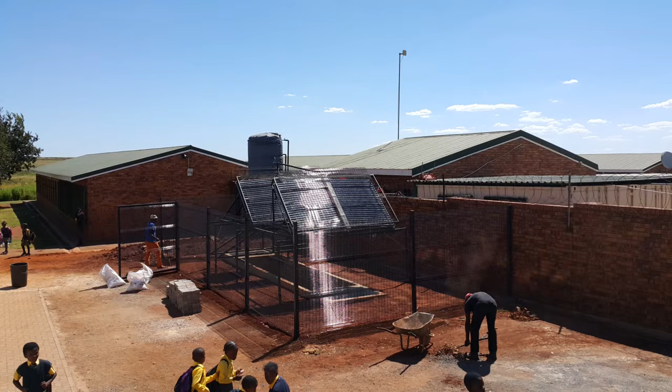The reason it was so popular at wastewater treatment works is that the anaerobic process removes pathogens, improves the quality and environmental impact of sewage sludge, which is the biggest challenge at these works. They can extract and clean the water, but they're left with sludge, which becomes a major problem. So digesters were installed specifically to reduce the pathogen content of the sludge, as well as the volume they need to get rid of.

The other probably 50% of the 400 odd installed in South Africa - nobody knows exactly how many, but that's a close enough figure - were installed as rural digesters, mainly with grant funding, in rural communities, clinics, schools, and that kind of thing. Some are still working, some are not, for various reasons, mainly maintenance and the type of digesters that were built, which we'll talk about later.

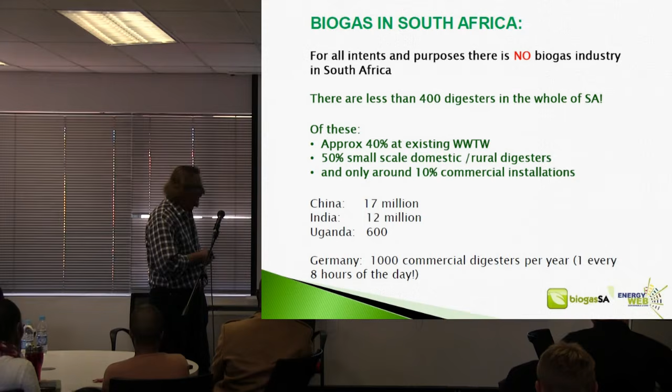But if you compare that to a country like China - we talk about having 400, China's got 17 million digesters. India's got 12 million digesters. Uganda, next door to us, not exactly a big country, has got 600 digesters. So there's a massive potential for biogas to be developed as a viable, sustainable, sensible technology in South Africa.

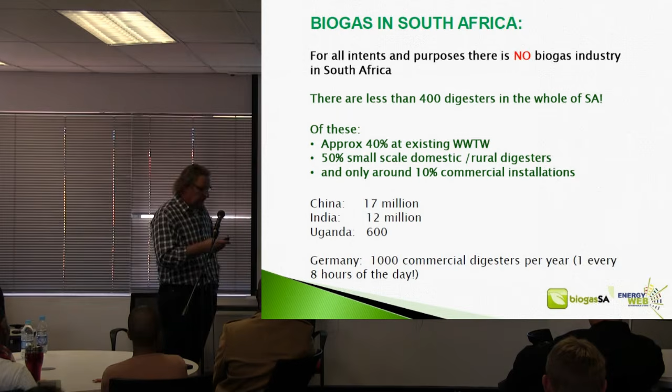The Germans are the leaders. They've got about 7,000 large-scale commercial digesters up and running in Germany at the moment. It's sort of reached a plateau and is dropping down quite considerably. So we've got a lot of interest from European biogas companies looking at the potential in South Africa. At one point they were building one commercial digester every 8 hours, about 1,000 digesters a year. There are many other European countries that are also quite advanced and make use of biogas.

This is just interesting to see - there's a massive potential in South Africa. Putting small digesters into areas where people can see it, like Cummins is doing, that's brilliant. From an association point of view, from a biogas enthusiast's point of view, that's the kind of project we need to get out there, so our kids can see practically how biogas works and say, wow, that makes a lot of sense - getting them involved in bringing food waste from home to school, chucking it into the digester, and knowing that their lunch tomorrow afternoon is made from the food waste they put in. That's where we need support, and the work you guys are doing with schools is absolutely brilliant - we applaud you for it.

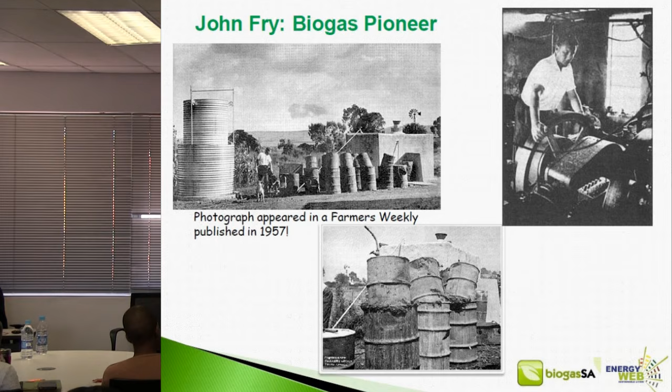Here's something interesting - I mentioned that way back we had digesters in South Africa. This chap here, you can Google him, John Fry. He's seen as one of the pioneers of the early commercial digesters. He had a pig farm and started with a very simple system - as you can see, it's just two 45-gallon drums. The top drum actually sinks into the liquid of the bottom drum, and that way it seals it so no gas escapes.

And as the gas is generated, the top drum simply starts floating. Very crude, but it worked.

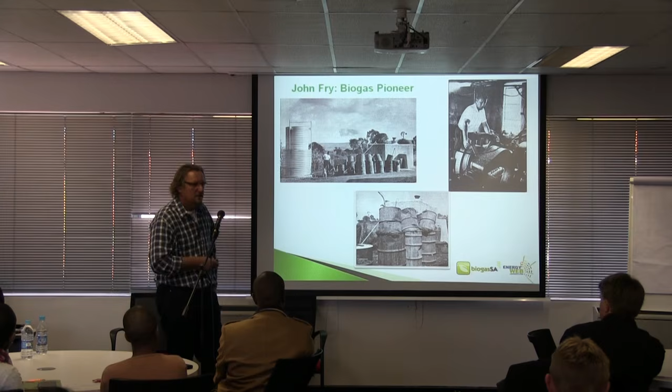He ran his Lister 6 horsepower engine for about 3 or 4 years on biogas. Interesting enough, the main reason he started experimenting with biogas is because of his neighbors, who complained about the smell of his pig farm. That's how he started with biogas.

Eventually, as I said, he made very good use of his manure to generate electricity, and it largely solved his smell problem as well. This was in the Farmers Weekly in South Africa in 1957. That's where this article appeared.

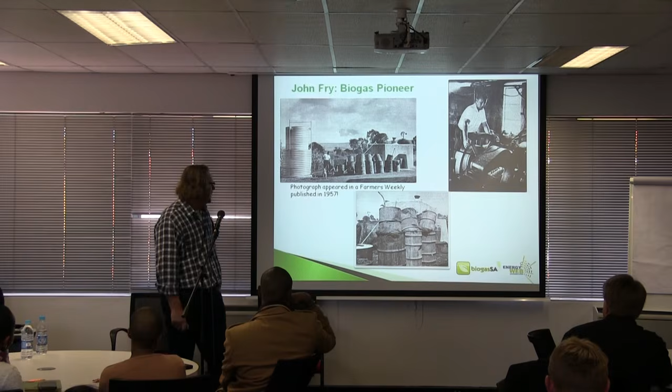So in the 1950s, as I mentioned earlier, we were the leaders in biogas, or initiated the practical application of biogas technology in the world. Eventually, he didn't get the support, and he went to the UK, tried his luck there, and eventually ended up in America, where he passed away. So the technology was lost.

I could have made the speech in 1957 if everybody listened to what old John Fry was saying.

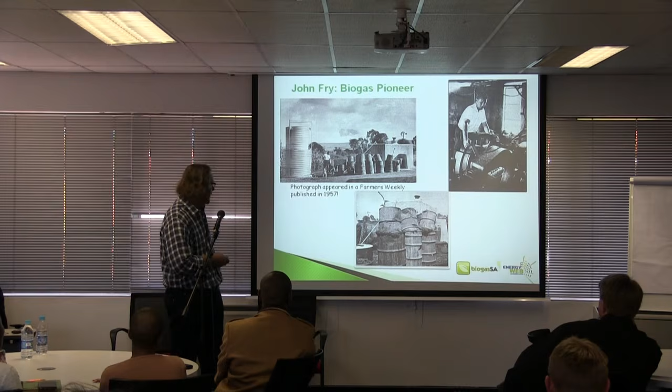Okay, now let's talk a little bit about what you can put into a digester. Typically, whatever you can eat can go into a digester. Any material that can be digested by your digestive system would be ideal to go in, with one or two exceptions. A digester doesn't like too much acidity because it likes to be maintained at a neutral pH.

So too many orange peels and stuff will affect the digester. But in essence, anything you can chuck on a compost heap, or that you could eat or could potentially digest - I mean, you're not going to eat manure, but you will be able to digest it, and the digestive system would be able to deal with it.

In wastewater treatment works, a lot of work was done in the early 1970s or late 1970s and 80s on sewage waste. We've actually got one of the most modern and recent projects - a commercial 1.2 megawatt installation done here at the Johannesburg Sewage Works, Joburg Northern Works sewage plant. They had digesters there dating back to the 1980s.

They refurbished the digesters, and about 2 years ago they put out a tender for somebody to utilize the biogas to generate electricity. It was very successfully done by a company called WEC Projects. You can go to their website, it's actually quite impressive - a very neat installation.

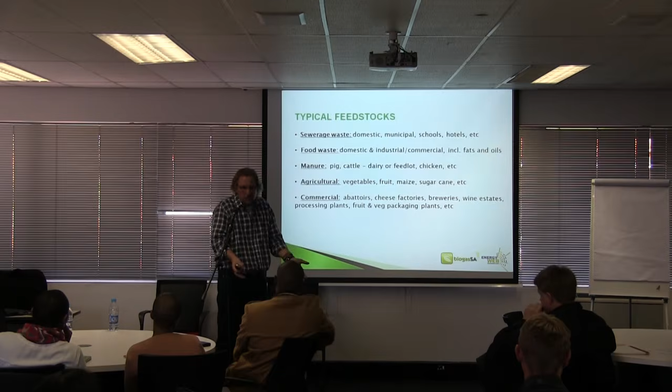And the energy you would have acquired from this, if it's not used, is it entirely stored until it is consumed, or is there a chance of losing it if it's not used within a certain period of time? Does it get completely stored?

Good question. Normally digesters work on a continuous basis. So if you chuck 100 liters of slurry into your digester on a given day, 100 liters will flow out the other side. It's only the solid content in your liquid that gets consumed by your microbes. One of the biggest things people neglect to understand or make provision for is that if you put 100 liters or a ton in on this side, it doesn't disappear—you still get a ton coming out on the other side.

You've just removed most of your solids that's been eaten by the microbes, so biogas isn't perfect. It's a brilliant system, but it doesn't just make things disappear - that would have been great as well. So whatever you put in on one day, you've got to either let it run out on another day or pump it out on the other side. So that was one of your questions - the other one will come back to me in a second.

Just on that point as well, whatever the consistency of the material going into your digester, I always say as a rule of thumb, it's got to be in the form of a runny porridge. The finer it is, and it's got to have enough liquid in it that you can pour it, that it can run - that's just a rule of thumb. It needs the water, diluted by water.

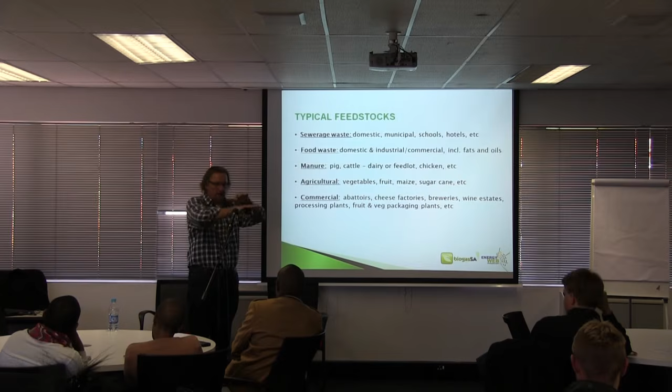So the guy said, 'Listen, have you got some waste pipe and a sail? Give me the normal waste pipe, 110 mil drainage pipes.' He made a square out of it, covered it with a sail, chucked it on that pond, and within an hour, that sail was standing with biogas. He tapped it off, and he lit it for the farmer. I mean, that's how practical it can be.

So the simplest form of a larger scale digester is what they refer to as a lagoon digester. It's literally for the pig farmers - all their manure gets washed out into dams. In its crudest form, you can literally just dig a trench right around the dam, cover it with a sail, bury the trench in the ground so the gas can't escape, and you tap off the gas. It can really be as simple as that.

And we've got the biggest plant to date that's on the cards. It's in Bronkhorstspruit - a 3 megawatt plant. It's massive, a 140 million rand project, based on primary feedstock from a cattle feedlot. They've got about 25,000 cattle standing in one spot, so that's a very good source of feedstock for your digester. But that's a massive installation based on a feedlot basis.

And manure - agricultural, obviously any kind of food waste. In Europe, you'll find that probably 90% of their digesters in Germany run on silage. So they grow grains, ensilage it, and that gets fed into the digester. That's obviously quite controversial because it's food that now gets used for energy. So that's a controversial topic in any country.

But also in South Africa, we've done a proposal for a fruit packaging plant - fantastic project. Instead of chucking and trucking all their skins and peels and fruit away, it goes into a digester. So there's massive potential there. I'm busy with a project with the Sugarcane Association down in Durban to use their cane tops that get burnt on the fields at the moment, to use that as a source for biogas.

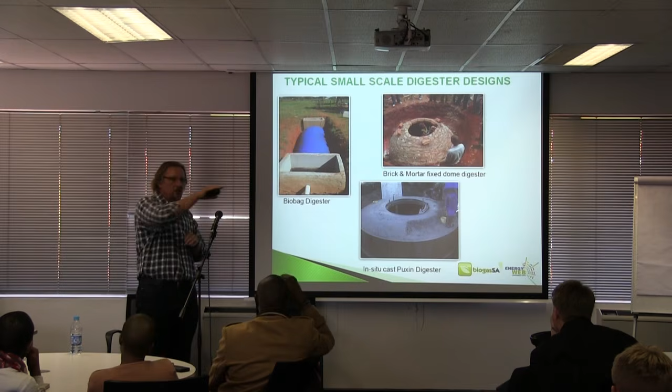If you've got a hose pipe, fill it up with water, and you put a cup of water in on the side, it's simply going to push out a cup of water on that side. Most digesters work on the same principle. You put your material into the inlet. It will progress through your digester, eventually come into the outlet, and your outlet pipe level will determine the level in your digester itself. So if you put in 100 liters there, it will simply raise the water level until 100 liters has run out of your outlet again. If you've got an area with a bit of a gradient, it can gravity feed out again, so you don't have to pump anything.

This is a digester I installed in Northwest Province. The ground is flat there, there's no gradient. So they put a bucket of slurry, manure slurry and food waste in on that side, and they take the same bucket and remove the same quantity out on this side and put it onto their vegetables. If they don't do that, the whole digester volume will be filled with liquid, and there will be no space for the biogas to accumulate.

How much do these cost? It very much depends. The biobag solution is probably your cheapest, it comes in a kit form, or you can install it. You can probably install that for about 15,000 rand. Your fixed dome digester is probably about double that cost, if not more. There's also an in situ cast concrete digester that's going to cost even more. So it depends on your application, where it is, your access to material, what kind of feedstock you've got.

So that's one of the biggest challenges around biogas: deciding what system you want to use, what type of job creation you want to do, how much skills transfer you want to do. Ideally, if we're talking about rural areas, you want to get the community involved as much as you possibly can, and let them install and train them how to build and operate the digesters, which is a little bit different from your big commercial digester.

So this is just typically 3 different types. This is called a biobag, or a soft balloon type digester. And that's what the majority of digesters in the world are built using - a brick dome structure.

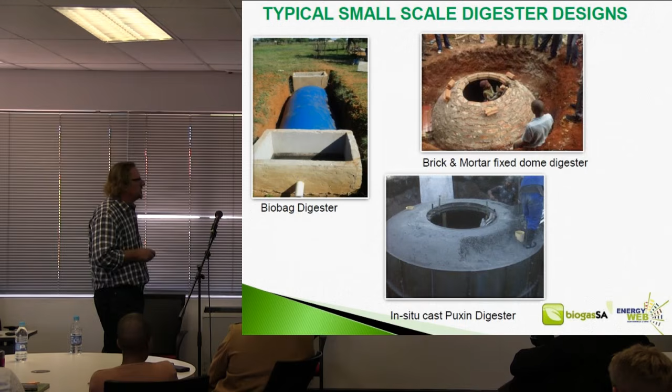I'm not too keen on this structure. I actually don't build any of them, and I haven't built any of them, purely for the reason that the minute you build that kind of structure in the ground, you've got a brick and mortar structure.

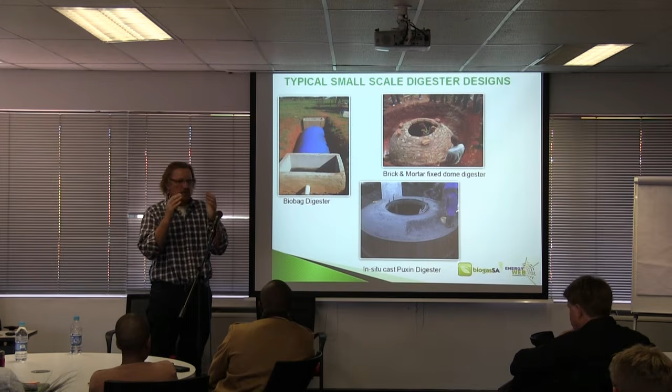If there's some settlement taking place, it's going to crack. If you've got a crack, you've got gas under pressure, you've got a maintenance issue. Last year we had a national biogas conference sponsored by the Department of Energy and the Development Bank of Southern Africa, and we were privileged enough to invite a speaker from India, Dr. Kale, a buddy in his 60s with vast experience of biogas. He said that of the 12 million digesters built in India using the brick dome system, only a quarter to a third are still operational because of maintenance issues.

If that thing cracks, to fix it up again is a major challenge. That's why I'm personally not particularly keen on it. It works very well, there's no question about it, but if it's not maintained, or there is a problem with it, it's extremely difficult to get it going again. So personally, from my side, I do the biobag system, or the in situ.

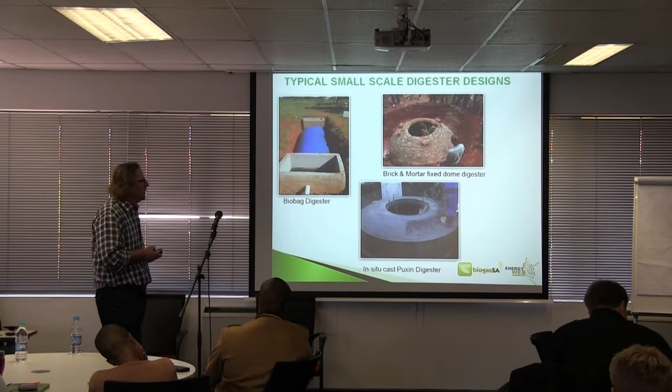Instead of doing it out of brick and mortar, we use concrete and a mold, and we build an in situ cast concrete digester. Then there's two digesters, roto moulded digesters, developed in South Africa. One is done by a company down in Cape Town called Agama, called BiogasPro - it's also a roto moulded system.

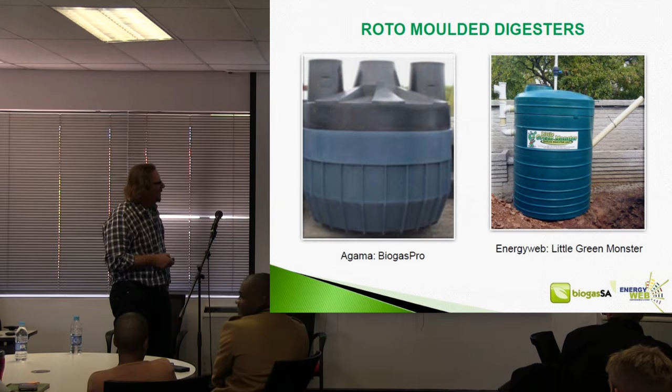And then we've got my esteemed colleague - where was he? On my right hand side, there he's at the back - who developed a brilliant system called the Little Green Monster. As Wally mentioned, it's on the small side, but perfectly capable for a small domestic application, uniquely designed in South Africa, very innovative.

So these are 2 typical products available in South Africa, but they're roto moulded. What's nice about that is you can put it on the back of a bakkie, drive it, drop it in the ground, and install it. Whereas with the previous digesters, there's a lot more manual labor involved. But any one of the five I've shown is primarily applicable on a smaller scale, rural type of application.

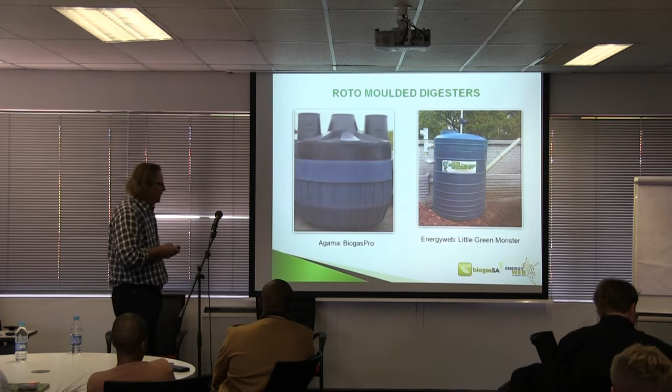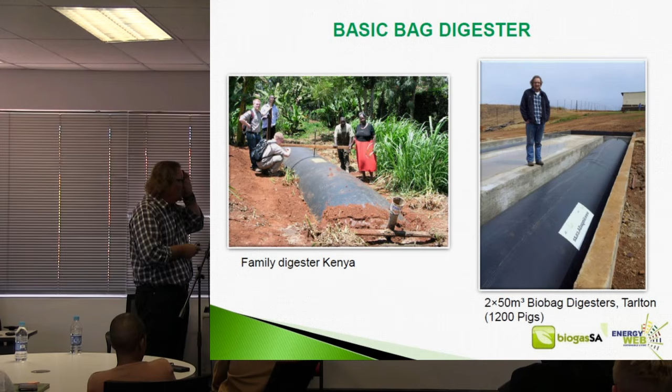This was one of my first bigger balloon digesters we installed at a piggery in Tarlton. These are two 50 cubic meter bags working on pig manure. It works very well - it's not heated, it's not mixed, so it's very basic. But as long as you maintain the anaerobic conditions, you will digest and generate biogas.

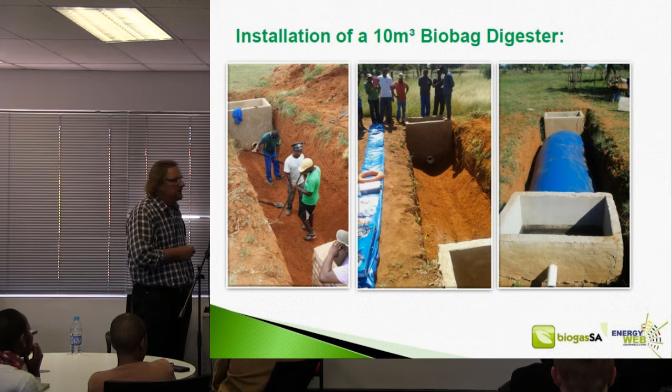Okay, that's just another photograph of how you install it. This is a local cooperative in Northwest Province. They got funding from the UN and money to buy - I was just a technology provider here, and we provided them the biobag in kit form. So this is exactly what will be installed at the school. We'll finish it off a little bit nicer than this, but the principle remains the same.

You literally just dig a trench, build an inlet and an outlet. In all communities throughout South Africa, they've got a bricklayer, so the only skill you really require is a bit of bricklaying, and you've got to plaster it. Then you literally just drop the bag in, connect it to your inlet and outlet, and there you go.

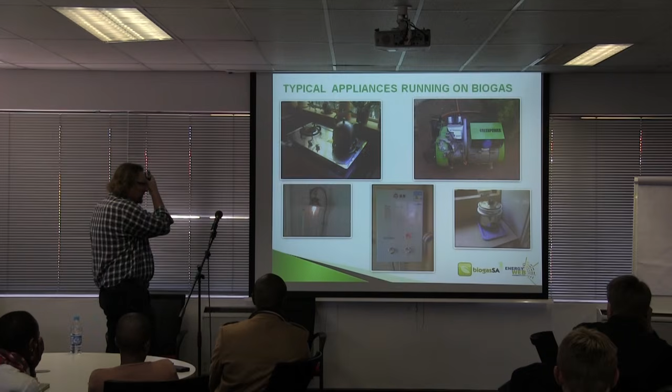So what can you do on a small scale? What can you do with the biogas? These photographs are taken in my house. I haven't bought LPG gas to cook on for the past 5 years.

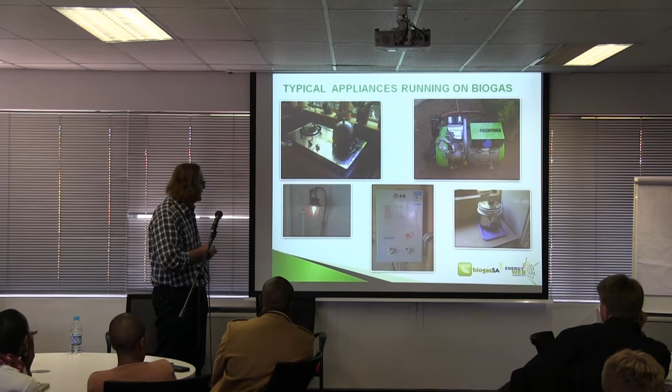We use the biogas produced from our digester primarily for cooking. But I've also got a little 700-watt generator, so if Eskom goes down, at least I can watch my favorite TV programs. You've got lights, it's just a little gas light that runs on biogas. We've got a hot water geyser that runs on biogas. And all of these products I bring in from China.

It's not been made locally, there's not a big enough market in South Africa to produce it yet. We're working on that one. I'm motivating government sectors to give us some funding to develop this.

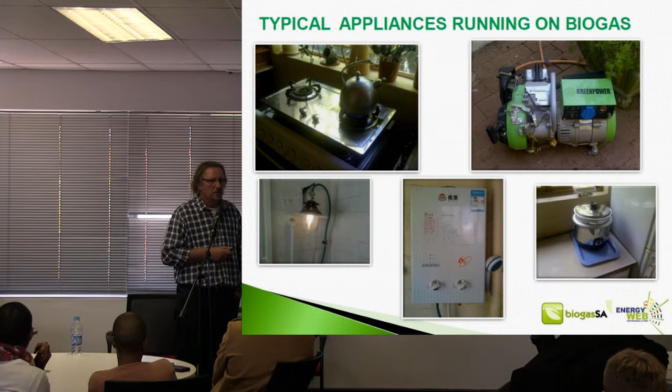So these, for two reasons: China has got 70 million digesters, so they've got a well-established market for small scale. You cannot buy any of these appliances in Germany, although numbers-wise, commercial numbers-wise, they've got the most digesters, because they simply don't use the biogas at all for domestic applications. They use all of it to convert into electricity and sell it back into the grid. That makes a lot more sense.

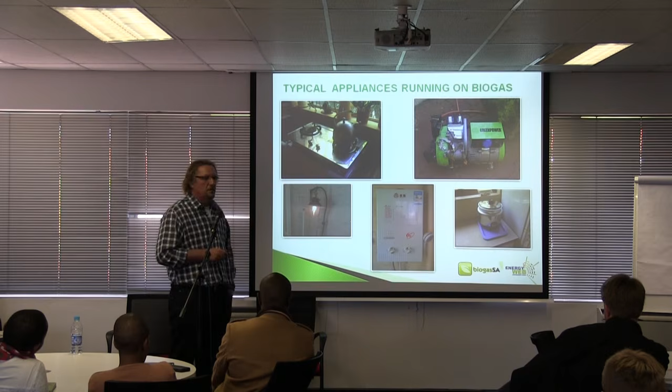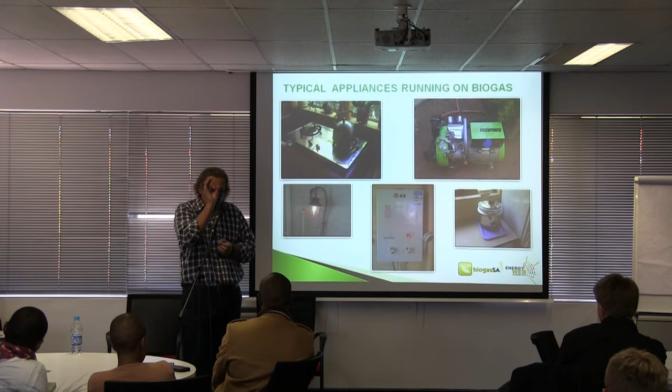Yes, Conan? Can you possibly mention how much gas the school is currently using and what we're hoping to offset?

What you can do is, at the school we'll probably be producing about 3 to 4 cubic meters of biogas per day. 1 cubic meter equates to about half a kg of LPG gas.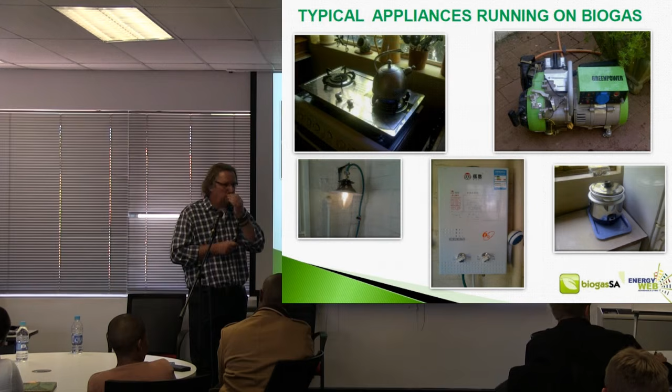So that's what we're talking about, it depends on how much food waste. I think they said they produced about... help me, guys, what was it at the school? About 100 liters, yeah. So we produce in the region of about 7 cubic meters of biogas at the school, if they've got 70 kgs going into it. About 10 to 15 kgs of food waste will give you 1 cubic meter of biogas if the system is up and running.

So, to give you numbers, to produce a cubic meter of biogas, I'm going to hit you with a couple of figures here. To produce a cubic meter of biogas, which gives you 1 hour's cooking time on a 2-plate stove, you need the raw sewage of about 15 people, 15 to 20, depending on the size of the person.

So 1 cubic meter is from about 15 people, or 3 cows' manure production will give you that. If you've got a very sophisticated system that is heated and mixed, 1 cow will give you a cubic meter of biogas, or 7 horses, or 15 pigs, or 150 chickens, etc. That all relates more or less back to 1 cubic meter, but there are a lot of variables that will play a role.

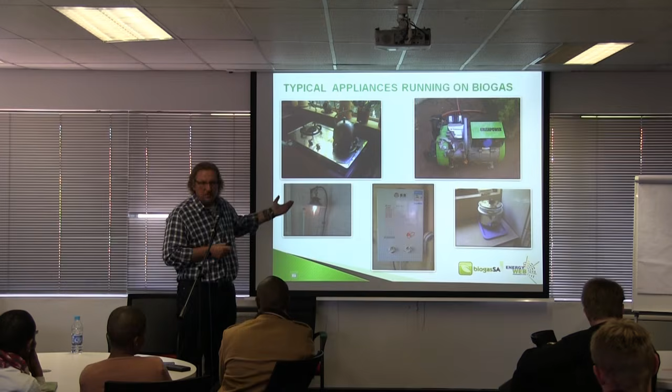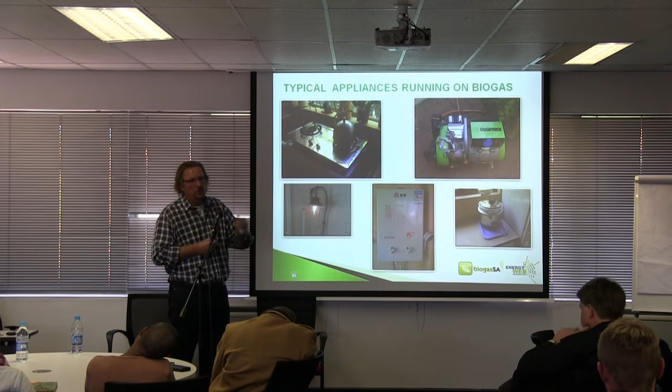That's one of the reasons I like the systems that I support, because you don't need a pump. You can actually do the same thing with two tires. But you need about 2 or 3 kPa. To answer your question, you can compress gas.

That's why you only really compress it if it's a massive plant and you want to do vehicular biogas. In nearly 95% of cases, it's more practical that you don't need to compress it - you use it as it comes out. You don't even have to take the CO2 out. The generators and your stoves run on the biogas as produced, with the CO2 still in it. You can scrub the CO2 out - that's another process - and then you end up with practically 98% methane, which has a much higher calorific value and much higher combustibility.

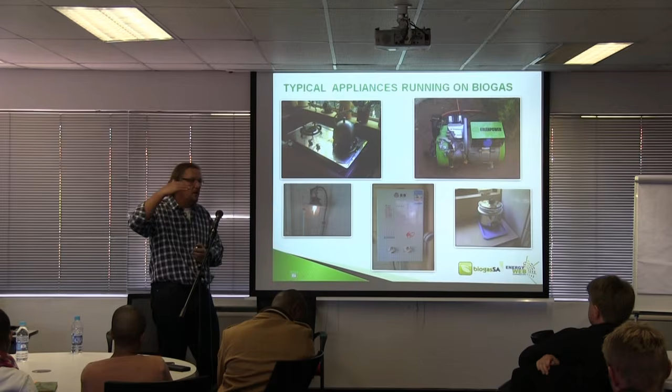So if you want to run your car, it's better to run it on compressed biogas rather than just the biogas that still contains the CO2 in it.

Do you literally just open the tap, or is there some kind of regulator that comes out of this bag? No, you just have a valve - it's free flowing. It's basic, and that's what I like about it. You don't need pumps and all kinds of stuff, typically for basic rural application.

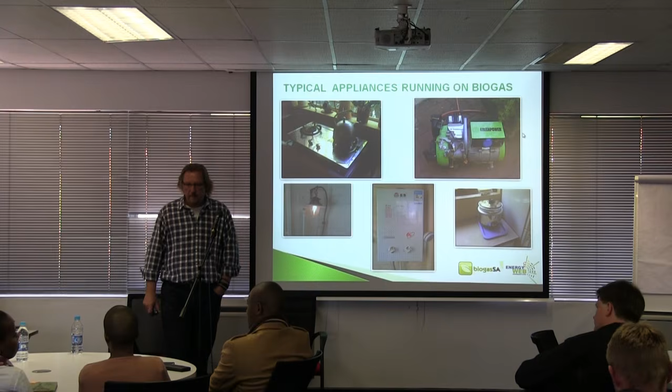From a return on investment standpoint, in the case of your house, how feasible is it, how long does it take to pay off, comparing to LPG or natural gas? That's a very good question, one that gets asked always.

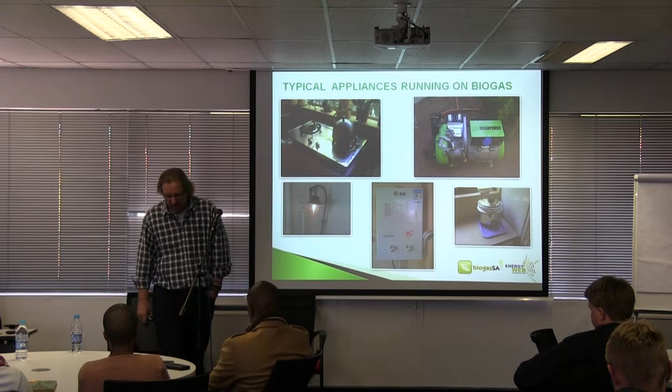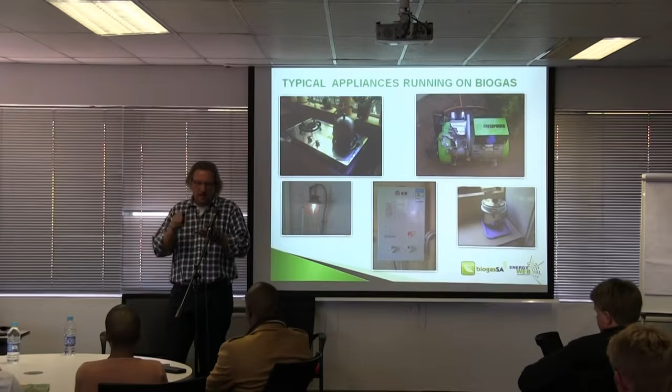That's where the biggest challenge comes in with biogas, because you've got so many variables that determine how much biogas you're actually producing. It's the type of design of system you've got - is it heated, is it mixed, are you getting the full 80% out after 20 days or only 60%? And the type of material - is it fatty-based, is it abattoir waste, or silage-based, or from a factory? All of those determine the financial viability, because that determines the type of plant, the size of plant, and whether you want to invest in mixing and heating as well.

So I'm not trying to dodge your question by any means, but it's extremely difficult to give you a straight answer. In my house - that's what I'm getting to.

In my house, it cost about 40,000 Rand to install my digester. I have sufficient material externally to put about 100 liters of slurry into my digester every day. I paid that off in about 18 months. But that's because I've got enough feedstock to put into it. If you've got less, it's going to take you 3 or 4 years to pay it back, just working it on replacing LPG gas. But if you can get the added benefit - if you're running a small generator, you can capture the heat - there's that extra value.

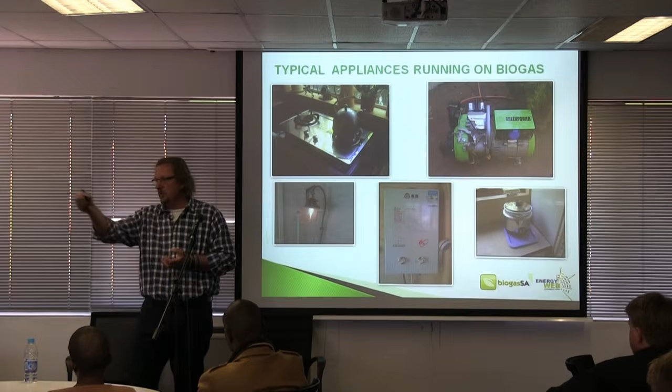If you've got compost, there's value in that you don't have to buy compost now. So there's a lot of factors that will eventually determine the complete financial viability of your investment.

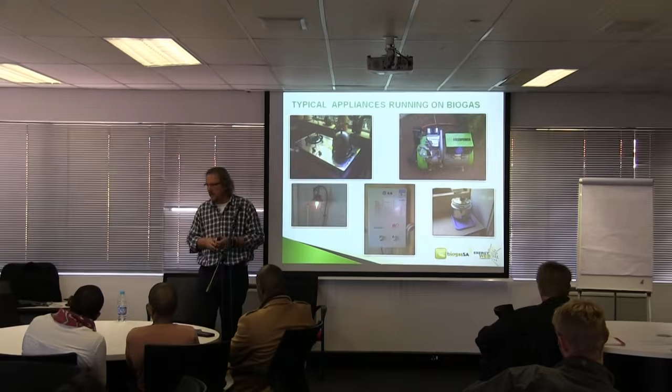On a big commercial digester, you're talking about a payback of about 7-8 years, depending on whether you get a grant or a subsidy or whatever the case might be. Obviously, the minute you get a grant and a subsidy, it makes the returns that much more attractive. But it is a very difficult question to answer because there's no generic solution in biogas.

You literally have to go and see, for instance. If you go to a guy who's got sixty pigs, has he got somebody there standing with a hose pipe washing those pigsties every day? Or does he go with a squeegee and pick up the solid manure that goes into the digester? Because that will determine how much solid material per volume you're putting into your digester.

If you're standing there with a hose pipe, it dilutes, so you only get about 3% solids going into your digester. Where if you pick it up with a squeegee and a wheelbarrow, you probably end up with 10 or 12% solids in the material going in. So in the latter case, you're going to get much more biogas out of your digester compared to where there's only 3%. So there's a lot of factors that determine the viability of it.

That's probably one of the biggest challenges we have in the biogas industry: having the knowledge, understanding and experience to do that calculation for your client. What we found is that there's a lot of guys who, because we haven't got the biogas technology - we had it in 1950, but we haven't got the technology or experienced personnel in South Africa, or companies with that experience - it's all based on theoretical experience.

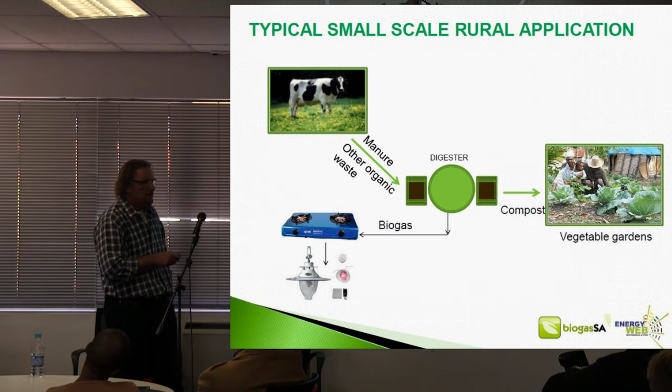...and make that the financial income for the project - it produces digestate out of the tunnel, waste out of the tunnel or the chicken farm, plus other waste from the house and whatever animals they've got, goes into a digester. That produces the financial viability for the project: job creation, permanent income. You've got a digester that gives you compost that goes back into the greenhouse. And the actual people, the owners of the project or the beneficiaries, get the benefit of all the biogas coming out, which they can use for cooking purposes or electricity or whatever the case.

Depends on how big the system is. But from a point of a sustainable rural project, the biggest need we have in South Africa is job creation in our rural communities, food security, and energy provision. When you develop this project to its full extent, we can address most of that, if not all of those challenges we face. So watch this space. Hopefully when we talk again, we'll have one of our pilot projects up and running that encompasses everything we're talking about here.

When you do that manure, you put it in the digester. Now what about the microbes? I'm talking about stuff like E. coli, salmonella. Would that be destroyed in the digester before you put it in as compost, or what are we talking? Very good question.

What happens in the digester, depending again on the variables we now understand, a certain percentage of your harmful pathogens will be removed or destroyed in the anaerobic process. But remember, it's not a full digestion process. You've only got anaerobic digestion, you still need aerobic digestion as well. If you take this material and put it through wetlands, you get aerobic digestion as well, and you'll remove some more of your harmful elements. But it won't remove all.

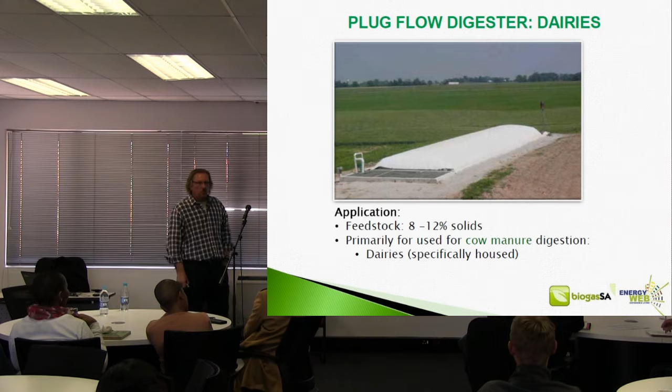Okay, just a couple of slides on more commercial sized digesters. This is typically what's referred to as a plug flow digester. It's literally one of my big balloons, it's simply what it is. This is in America, mostly manure based, and it works exactly on the same principle. This is why it's called a plug flow. It's because the consistency of these digesters, typically used for cattle manure, for cow manure.

Because of the consistency of cattle manure, it's got a much more tacky, sticky consistency. So if you put in a day's manure into the system, it literally forms a plug. Because it sticks together, it forms a plug right at the start, at the inlet. The next day's production will push that plug out a little bit further, and eventually that plug will steadily progress through the digester, so the plug flows through the digester. That's why it's referred to as a plug flow digester, but it's very specific for cattle manure, and sometimes it's been used for pig manure as well.

Very simple, very straightforward. It doesn't need a lot of sophisticated pumping and monitoring equipment. Traditionally it's not heated or mixed, it literally just progresses through the digester.

This is probably, it's called a CSTR, or continuously stirred tank reactor. This is what's built mostly in Europe. It's a huge big tank, it's heated, and it's mixed, and it's got a dome on the top that captures the biogas, which will get tapped off.

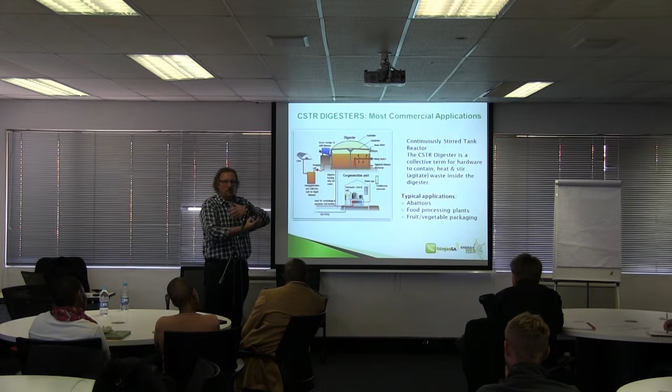Why you want to mix it is to make sure that the microbes are uniformly distributed and do their work as effectively as possible. These little pipes on the side are typically hot water pipes running through the inside of the digester. You get your heat from your generator, and you pump it back into the heating to heat your digester and maintain it at 37 degrees.

And that is typically how the majority of large commercial digesters are built. I'll show you a photograph a little bit later of a big tank that we've just completed at the abattoir that works exactly on this principle.

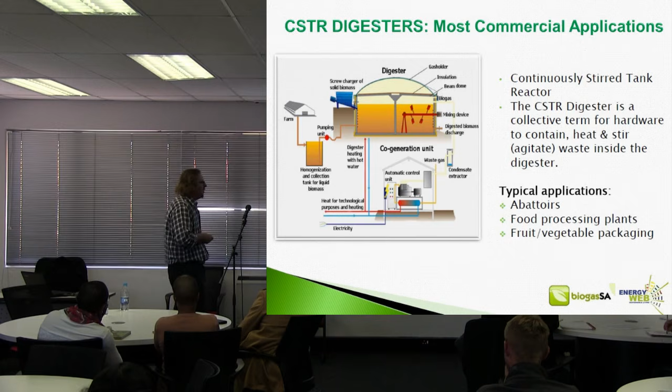So it's a closed loop system here. You've got your gas that's produced, runs a generator, the heat from the generator goes back and heats the digester again, and the digested material is discharged and goes to compost, as we said. But this is probably your most common type of digester used for commercial applications.

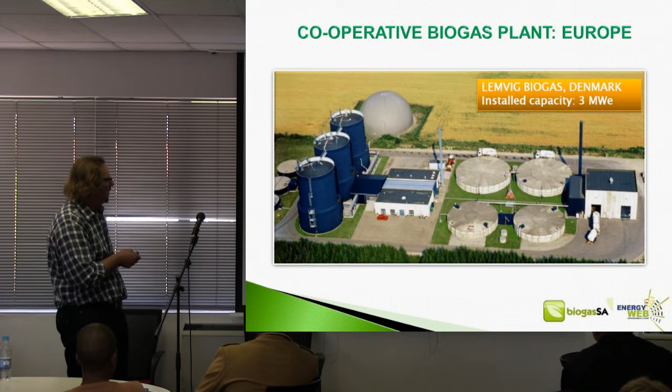And you will see in some of the photographs these guys come in and the trucks line up, 5, 6, 7 big tanker trucks line up to come and collect the digestate to go onto the agricultural fields as compost.

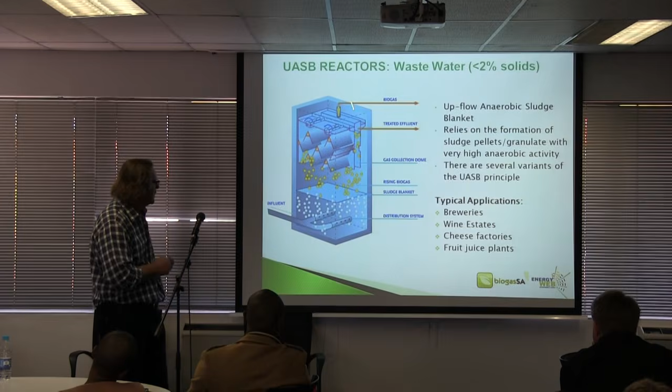So the material - there's millions and millions of ceramic balls or small pebbles in the bottom of the digester that give a surface area for the microbes to adhere to, and you literally force your feedstock water from the bottom through. The microbes consume the feedstock, the biogas gets captured and pumped off. This will typically take anything from 18 to 48 hours retention time.

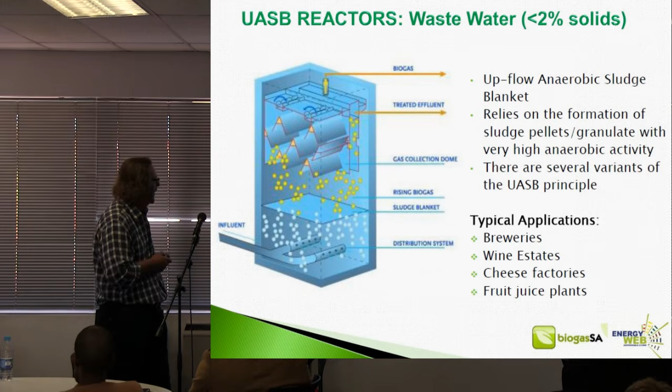It's very, very quick, very efficient. The system is much smaller than your typical big tank reactor, where we're talking about 30 to 40 day retention time. So they're quite efficient, it works very well, but it's a very specific application.

I did a study for municipalities to look at the waste to energy potential at municipalities in South Africa. These digesters - Upington, Potch, Newcastle - were all built in the late 1970s and 1980s. This is a typical digester, so next time you drive past a wastewater treatment plant and see these tanks, that's a digester.

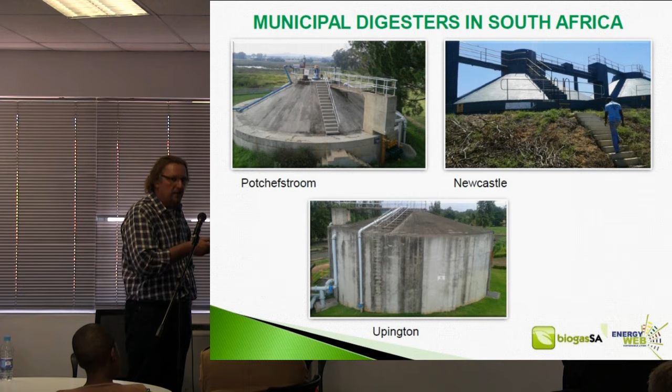That's what it is. Most of these are actually open at the top - they did not capture the biogas. They weren't interested in the biogas side of the digester, they were more interested in using it to reduce pathogens and reduce the volume of solids in the manure. When I was in Upington, the guy told me that about 10 years ago, apparently one of the maintenance guys that just started at the plant...

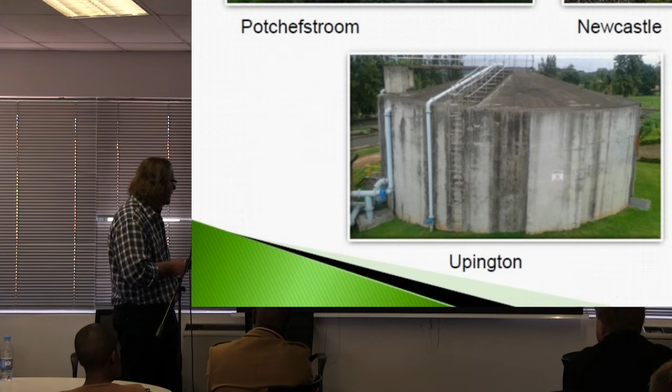He climbed up and stood at the top of the digester, enjoyed the view, and lit a cigarette. They found his body 3 kilometers away. So yeah, it can be very dangerous - one has got to be very careful with combustible gas. It is a combustible gas, one has got to be very careful.

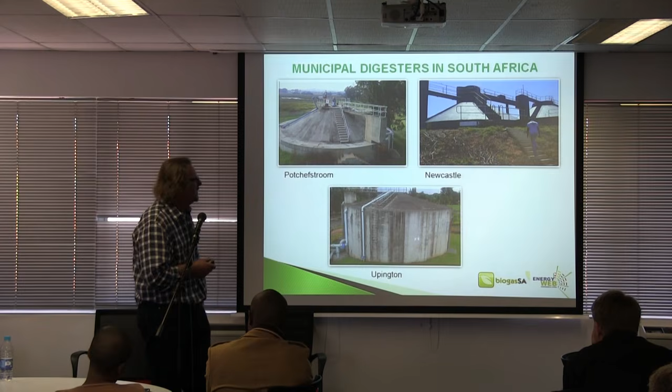Typically these big digesters were mixed. They've got a mixer right on the top that either mixes, or it simply pushes the water down, pumps it out, and circulates it - that's how they mix the digesters. So there's a couple of hundred of these digesters at various municipalities in South Africa.

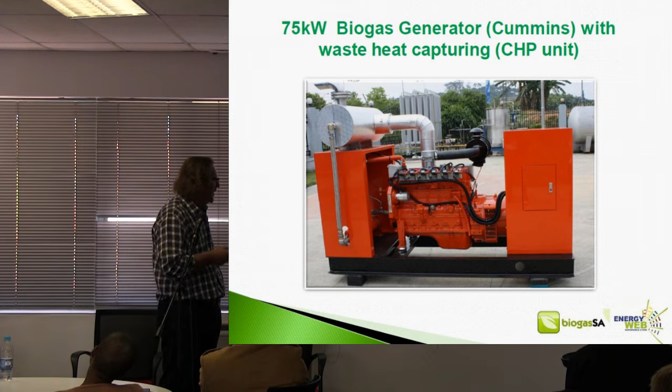So that will just increase the efficiency. You normally get electrical efficiency anything between 32 to 42%. If you go for a big Jenbacher, top of the range, you'll probably get about 42% efficiency. On something that comes out of China, you probably get about 32%.

But for what we spent on the generator we installed at the abattoir, it was about a 5 million rand generator. We could get it for 3 million rand from China. The one we installed has got about 38, 39% efficiency.

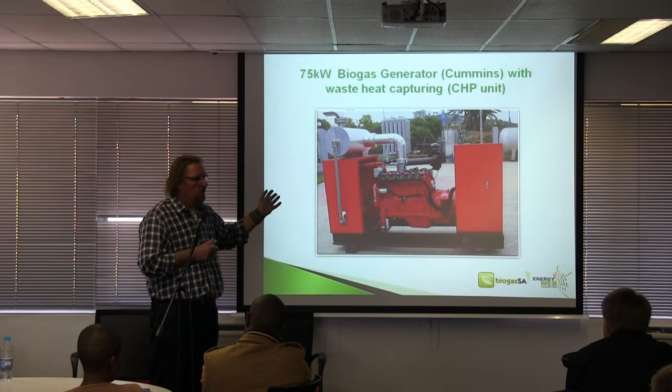From China, we could spend 2.5 to 3 million rand and get 30% efficiency. Or we could spend 6 to 6.5 million rand and buy one from Jenbacher. So it all varies on what you can afford, and that will determine your financial viability as well - whether you spend 3 million rand and get 30% electricity efficiency, or whether it justifies spending more on a more sophisticated, high efficiency generator.

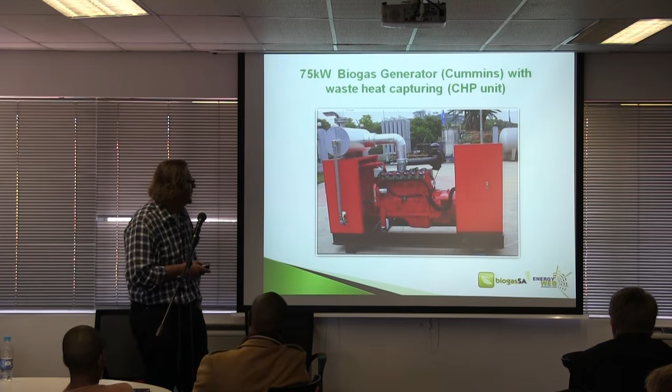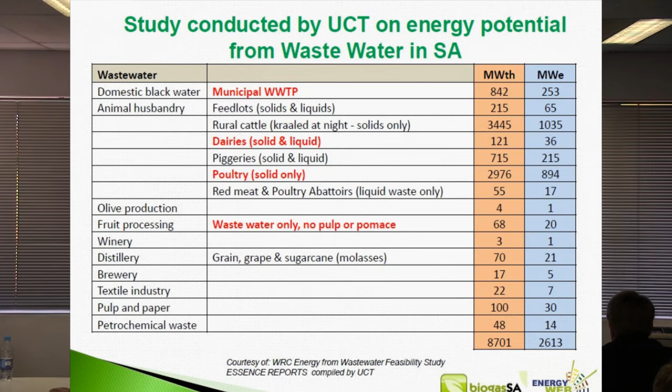Okay, I think we're nearly done. This is just a study that was done by UCT for the Water Research Commission, done about 2-3 years ago, just to get an idea of the potential for biogas generated electricity in South Africa. They came up with 2.6 gigawatts of electricity from biogas.

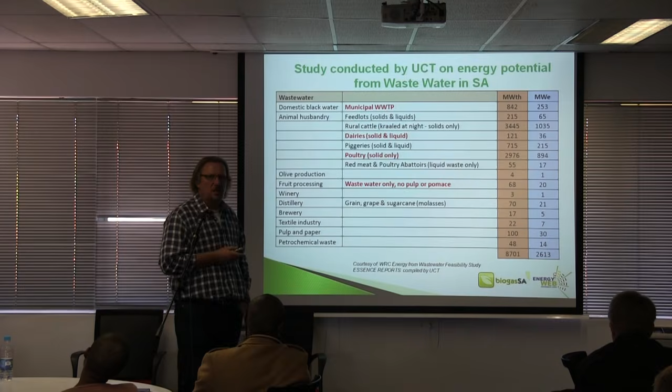Now, if you look at the whole renewable energy sector, Wally, correct me if I'm wrong, I think it's about 9 or 10 gigawatts target for all renewables in South Africa. Biogas didn't even feature in their planning until recently, but we could probably achieve 25-30% of that entire 10 gigawatt target with biogas. And this wasn't even a fully comprehensive study.

I just did a quick calculation when I did a presentation to the bank - we're talking about a 10 billion rand investment without even trying. So it really could make a major contribution, not just from an environmental point of view, a renewable energy point of view, carbon mitigation, etc. Actually, just purely from an investment point of view for South Africa, it makes a lot of sense to look at biogas.

Just a couple of pointers here. Why, as I asked before, has biogas not been developed up to now? One of the main reasons is because we were spoiled with electricity. We weren't interested. If somebody said, put up a solar geyser 5 years ago, you would have laughed at him. Why would I? I just use electricity.

Now it becomes a real factor to consider a solar geyser as a viable option. But in the meantime, what we've done in the past couple of years is create an association - a national platform where we got all the government departments sitting around the table, plus Eskom, the IDCs, the SANEDIs, the CSIRs, all of them sitting at one table to promote biogas.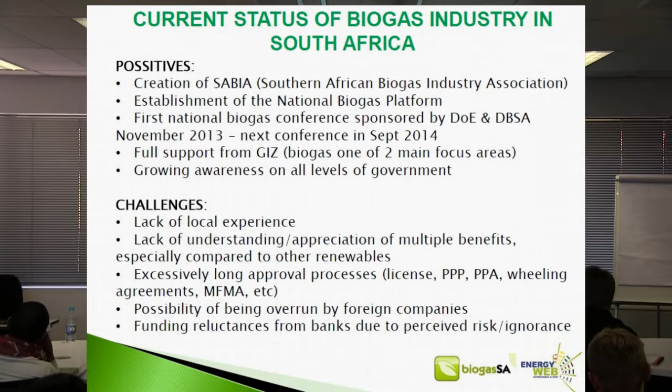Everybody thinks biogas is electricity, and that's where it ends. The processes it's got to go through as far as licenses and so forth are very challenging, because with biogas there's no frame of reference for the specific government departments to approve these projects. We've got to learn and go through the process.

We've got a lot of foreign companies coming in at the moment looking at this, because the European market is quite saturated at this point in time. We've got companies coming in from overseas with overseas know-how and technology. And obviously funding is always an issue, but that should become easier the more projects that come out.

I think that's about the end of the presentation. I'll skip that one and go to that one. Okay, but yeah, if there's any more questions, I hope I've given you a bit of an understanding of the broader picture of where biogas comes from, what can be done, and what benefits it has of promoting a project like the one you guys are doing at the school.

It's good work, and it's very exciting, and it's not even a technology because it's naturally occurring. It's a very interesting field to be in, biogas, because it's literally probably the most natural way to generate electricity. Education, social justice, environment.